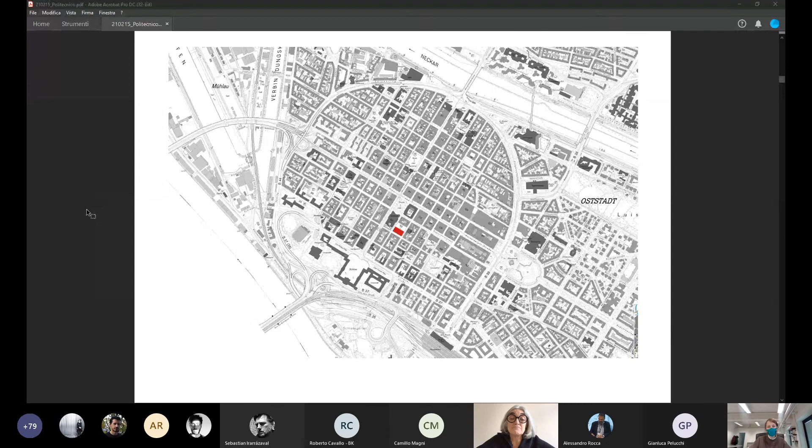Okay, so as you can see, a lot of new building of the 50s, of the 60s. It's not a fantastic, beautiful city, let's say. And the place where we intend to build is this part on the right side, and at the moment there is a garage.

On the place of the garage, we put our new library. And the idea is, of course, that we do not intend to confront the urban structure, but just to confirm this city plan.

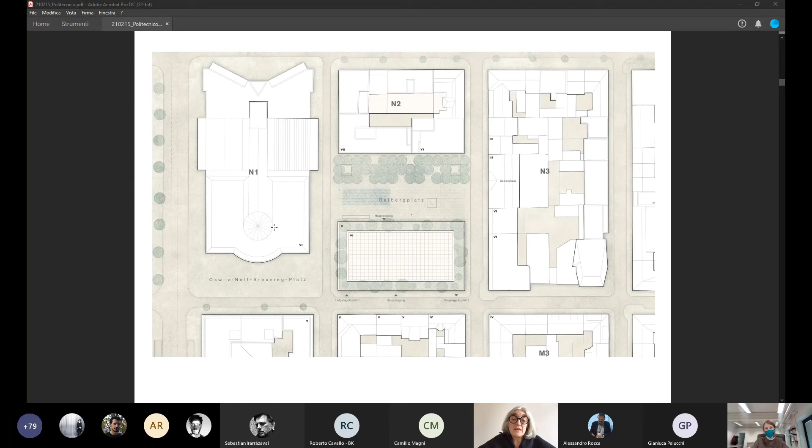So this project is mostly to understand in section, and we were looking for a strategy that allows us openness, flexibility, sustainability, which is a big challenge in this time, and at the same time identity, specificity, and a sort of toughness or robustness, which can endure the change over time and nevertheless maintain its character.

So we thought it was very important to find a structure which could maintain an idea of identity, of specificity, and at the same time allow this flexibility and openness.

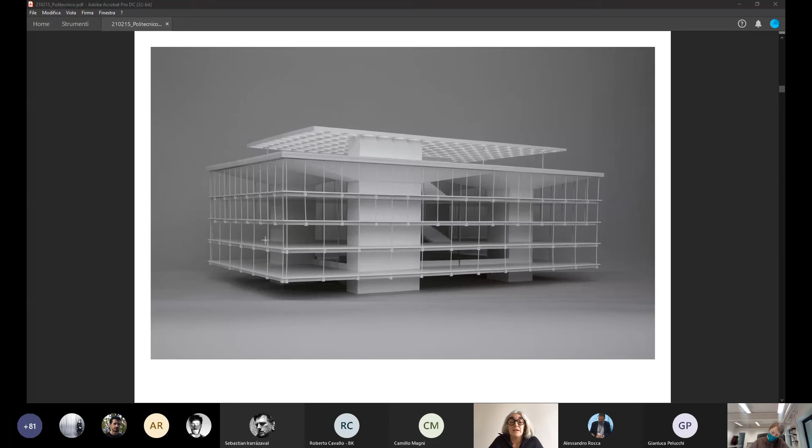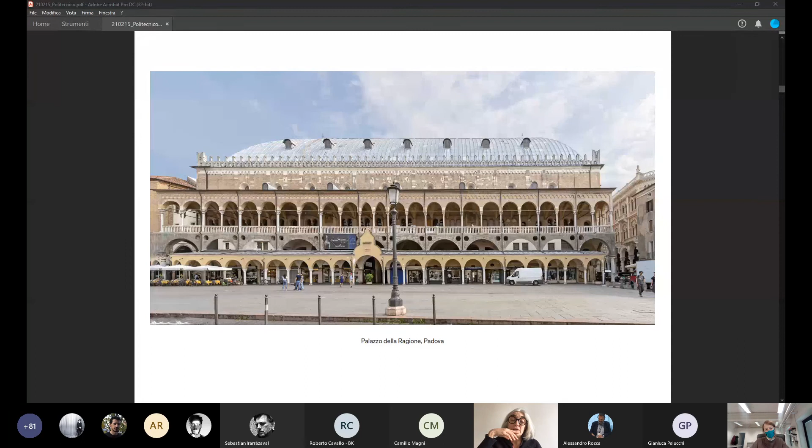A very important reference was the Palazzo della Ragione in Padua, with this transparent and very permeable ground floor and a structure above.

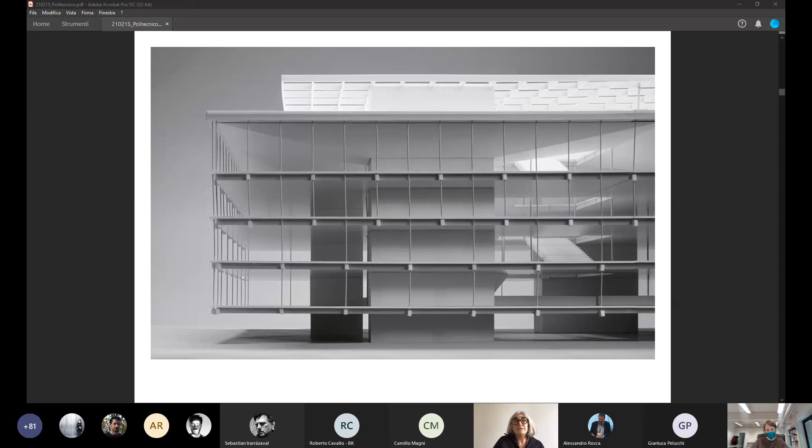So as you can see, we have four mushroom structures - in Italian, una struttura fungo, in German, Pilzstruktur. I don't know the right translation in English, but you have a structure, so four pillars in concrete, which contain all the secondary functions, the stair, the lift, the shafts, all the technique, etc.

And above, which can offer a perfect container for earth - we have a big garden on the roof, and there was a specific request of the briefing of the competition. And from this big element, we suspended a construction, a wood construction.

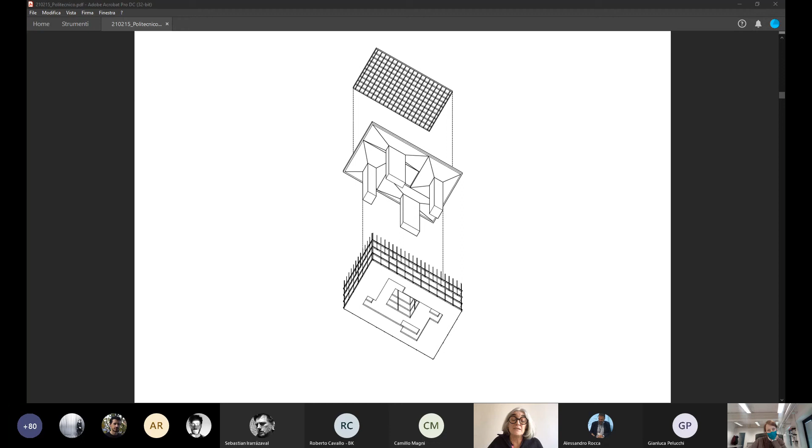So that is the element, the four pillars of the mushroom construction, and then the hanging wood construction.

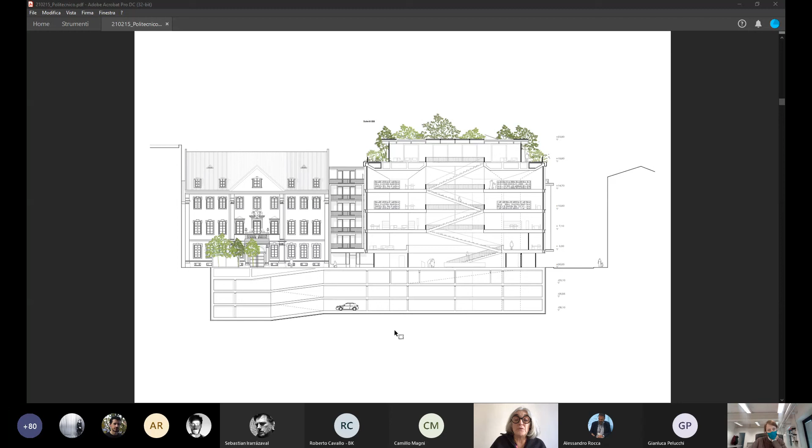We have a big staircase, an open staircase, which is also almost a space, which unites the different floors.

And then you see here the four elements, which allow a very flexible room that can change over time. That is the ground floor - it can change over time, so it's not specific in the distribution of the function.

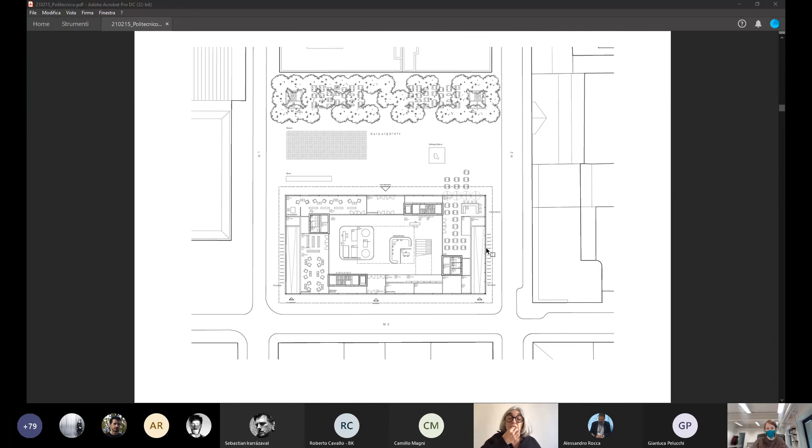So the same idea, in a way the same situation, you can find on the next floors.

So here the structure, the section, the detail. That is also a very important aspect of our work - we are working at the beginning of every competition, and of every project, with structural engineers and with specialists for systems, for facility, for technical building equipment. In this case we're trying to work with really good ones, since they are as important as the architect. So I think at the moment there's no way to work alone as an architect - you have to have your team, very, very good engineers.

For this work, for instance, we worked together with Transsolar - we made a fantastic energy concept. And with the structural engineering office Schnetzer Puskas, which are, in my opinion, one of the most interesting structural engineers in Europe. They work with a lot of Swiss architects, and it's really incredible. It's extremely noticeable when you work with this kind of engineer - their work is exactly as creative as our work as an architect.

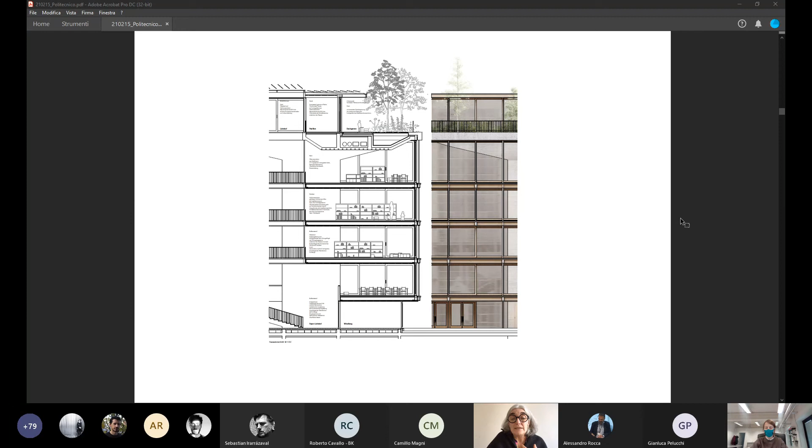So you can see some images of the model. We work a lot with models because a model is really important at the beginning - this was a model we were doing during the competition, because a model is really a way to understand the spaces.

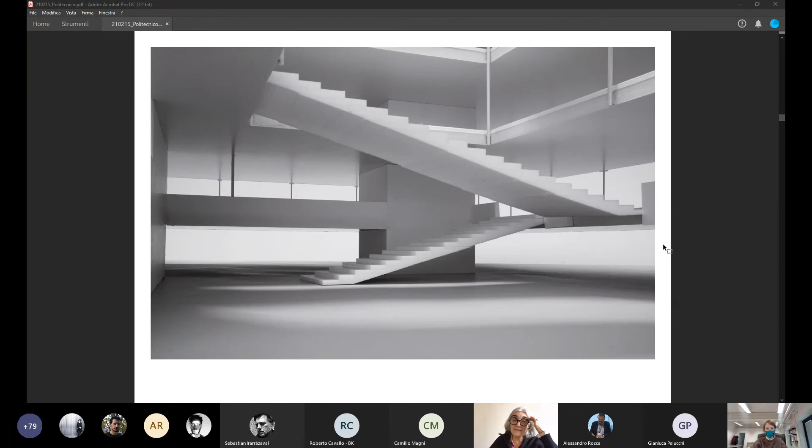Okay, that is the staircase between the different spaces. And that is the upper floor, where you can perceive the dimension, the form of this big pillar, and the mushroom, you could say.

So I was talking before that the way we understand knowledge, how we understand how to convey knowledge, is changing in recent times, at the present day, and it's also consequently changing the way we are teaching, the way we are intending teaching. So the idea...

The way we are intending teaching is changing, so the way to convey teaching. The frontal lesson will be less important. There is a different way to teach: teaching in a small group, teaching all together in a bigger group, and teaching in small projects and so on. Mostly our schoolrooms are not able to respond to these different requests from the program.

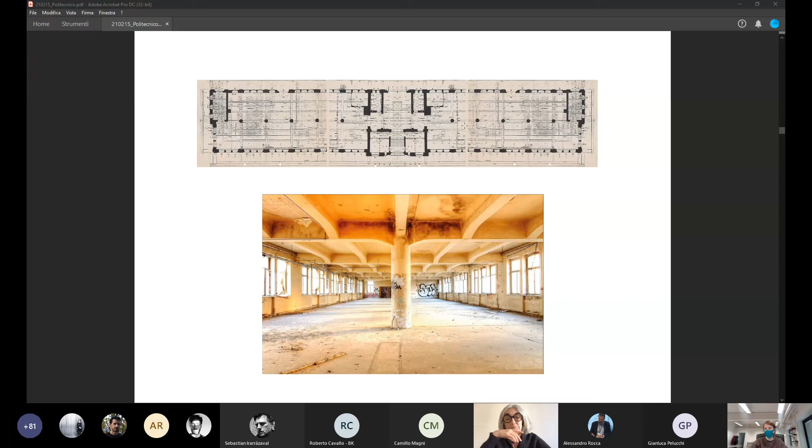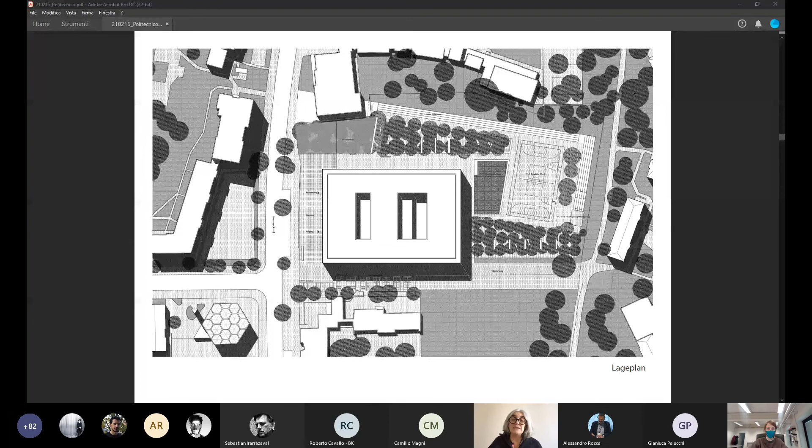In this case, we had a very small plot, but in Berlin there is a big need for schools. They are trying to build, I think, 80 schools in the next 5 years, and they are looking for any plot they can find to build a school. This was a very small one because the external part is also very important - the external sports places are very important for the school.

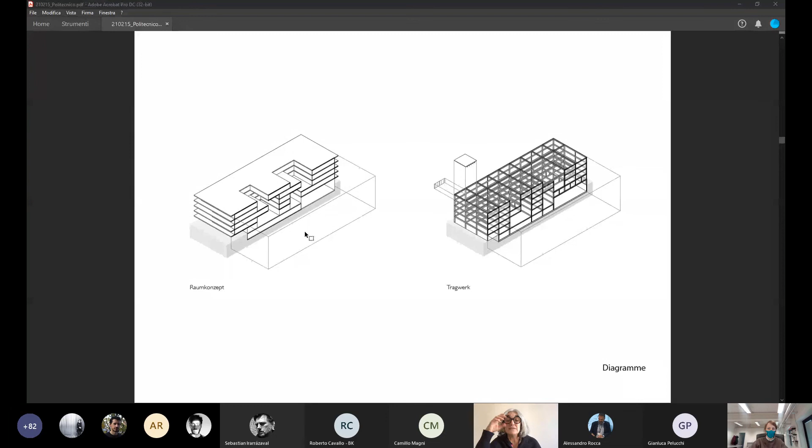This project is better understood in section. It's a grid principally. On the left and right you have the classrooms, and in the middle you have the library and different kinds of workshops. Between the workshops and the classrooms you have very big spaces, as big as the classroom, which are distribution spaces but also spaces where you can learn informally, with different possibilities of learning and interaction.

We also integrate the sport facility on the ground floor - you can see it on the right, the gymnastics hall. Since it was really a problem to use as little space as possible, we used the floor above for the structure of the sport facility, so we don't need extra space - we can use every space. So the structure itself is also a space that we use for our program.

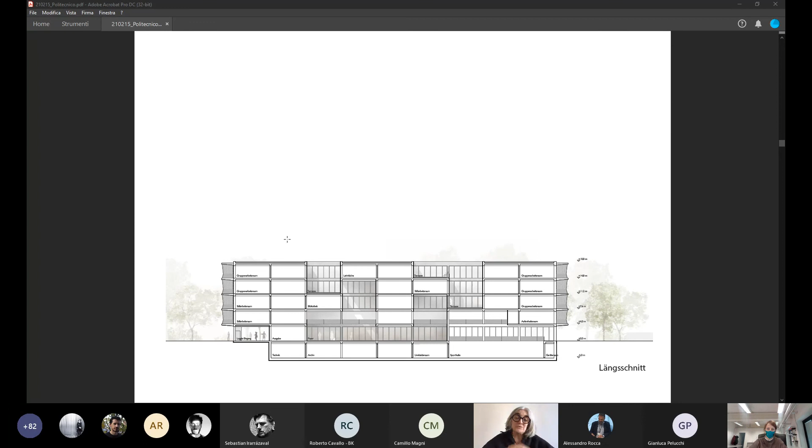Here too, a very flexible space. This is the problem when you try to use the corridor as a teaching space - you have a lot of problems that have to do with fire security and of course structural problems. We solved this problem with a balcony, a walkway for the fire escape, but also used as a room.

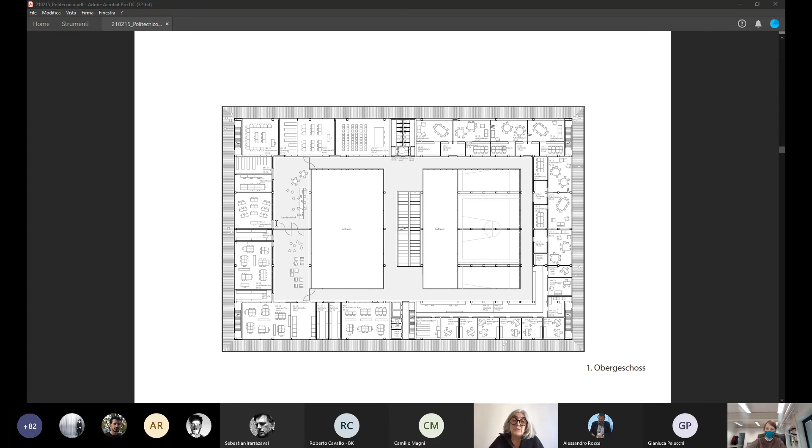That is the idea of the school, and now we are working with a very similar principle for 7 schools around Berlin.

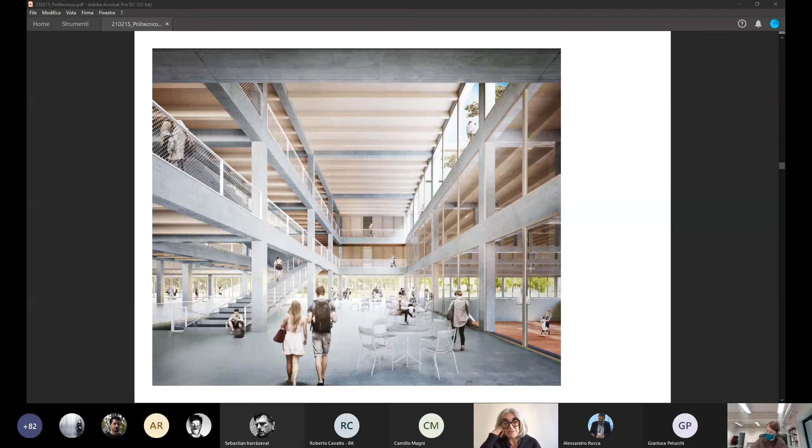In a very similar way, we worked with a kindergarten, in Switzerland, in Lugano. The idea is in a place in Lugano - on the left side you have the historical city, on the right side is where the kindergarten was built.

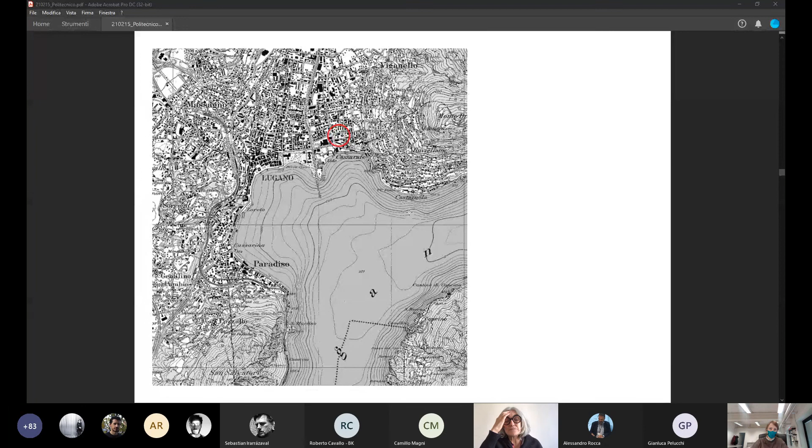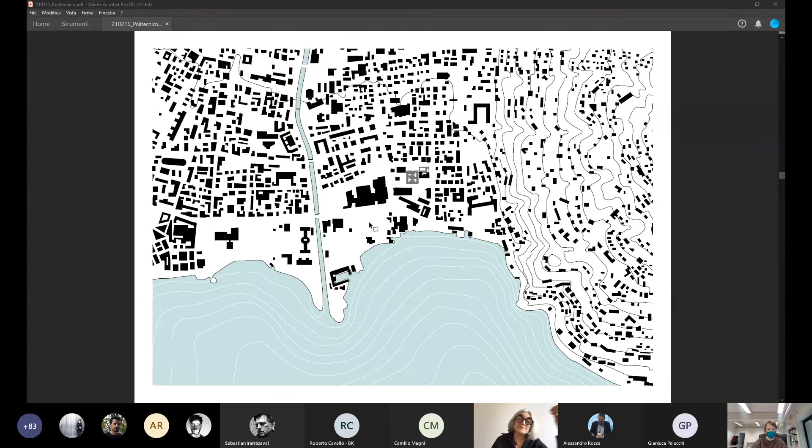This is part of the 1970s city, the city of the 70s. It shows a very typical structure, like a sort of compromise between the city of blocks and the modern idea of the city, with the green and the buildings on the green. Actually, the problem is that this kind of city proposes a lot of junk spaces - not all spaces are really well thought out or well done. So that is the situation.

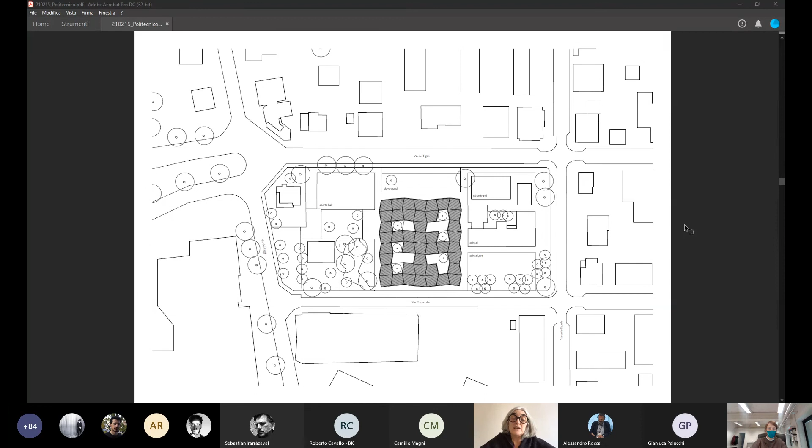So maybe I won't go too much into the question of the urban structure. We have to complete this block, and on the right side we have the school, and we completed the school with a sort of covered playground. On the left side, there is the kindergarten.

So both buildings have this: the existing school is completed with this covered playground. On the other side there is the entrance of the school and of the kindergarten, and in front of the kindergarten, from this side, you see a playground.

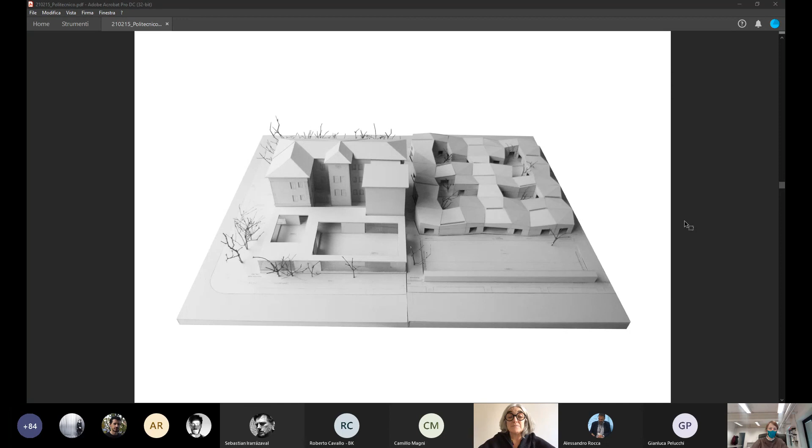The building is a one-floor building. We think that for a kindergarten, a one-floor solution is a very good one. We decided to work with this building with an idea where we try to bring together the distribution and the spaces of the classroom, so we worked on that next.

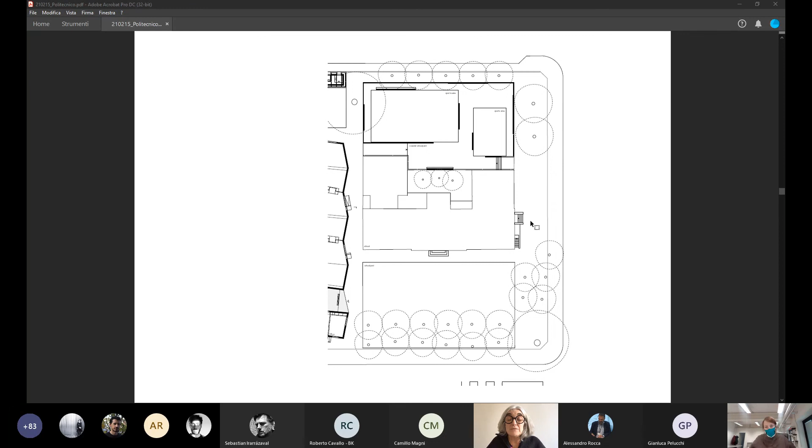That is just the covered playground. It's a concrete structure, very different, completely different in idea from the kindergarten.

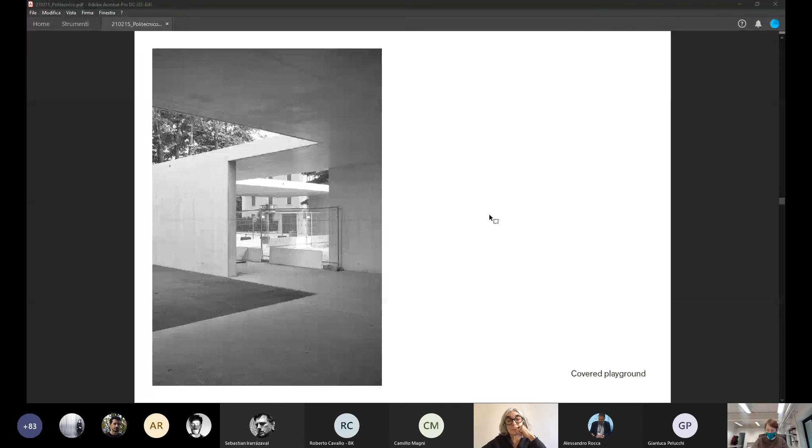But I want to talk with you about the kindergarten.

A very important reference for us was this beautiful building by Scharoun, the Geschwister Scholl Gymnasium in Lünen. As you can see in this building, Scharoun works very much with space, with the definition of the space in between.

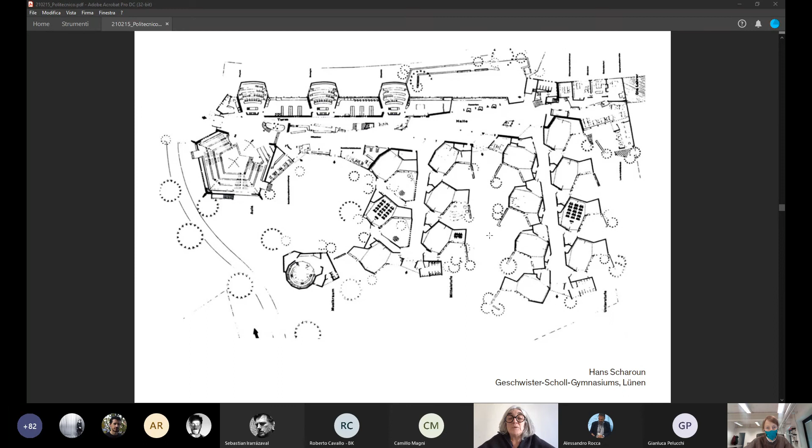So creating a very interesting gradation in privacy: from the privacy of the room, there is then a sort of space for entrance into the classroom. And you also have a sort of garden, an open garden that's considered like a sort of open room. It's quite interesting how one room leads into another.

So we used a principle known in mathematics, in geometry: tessellation of a flat surface, which is the covering of a plane using one or more geometric shapes, let's say tiles, with no overlaps or gaps. In mathematics, tessellation can be generalized to higher dimensions and a variety of geometries. But this idea was used a lot.

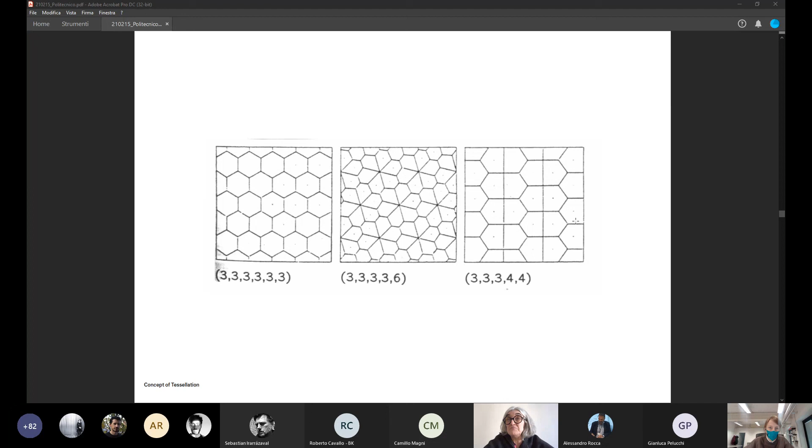Those are some examples of tessellation, which was much used in architecture. That is very typical for the Alhambra, so the beautiful tiles of the Alhambra become something else. And so we tried to work with a sort of tessellation, a very simple one in comparison to this, for instance.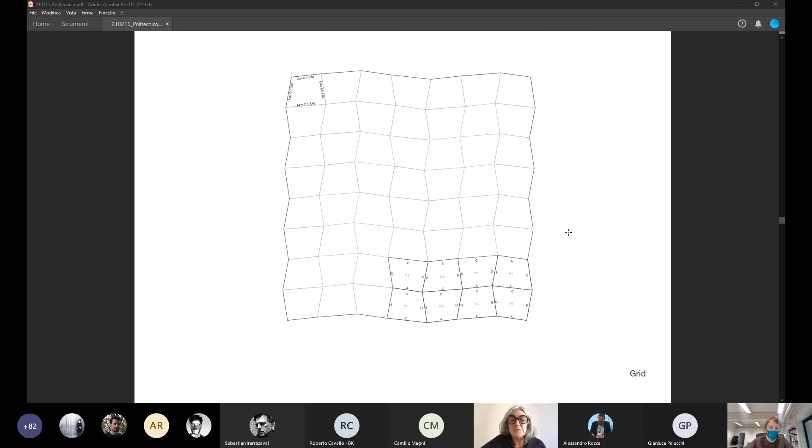So you see the grid, the initial grid, which is made from a module—actually 4 different modules. That is the principle of the work.

We have 5 teaching units, and every unit is composed of 5 different rooms, so 5 different modules put together form the unit. You see the module at the beginning, and then the first classroom.

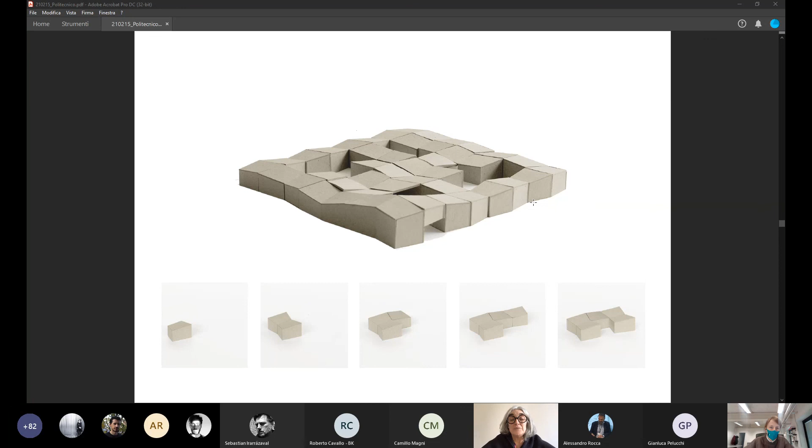Then you see the different classrooms. They come together, put together in different ways, so that you have a sort of differentiation within the uniformity of this grid. Every time you have a different situation through the light, and the classroom functions a little differently, but of course it's always the same room, just composed together differently.

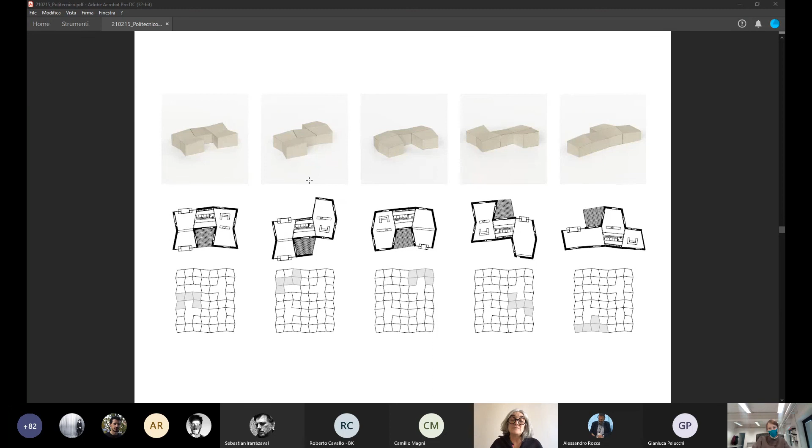So that's the part we were working on with a model during the competition, just to understand the structure of these elements. Of course, this kind of moving wall has some quite interesting aspects for acoustics, which is very important in a kindergarten.

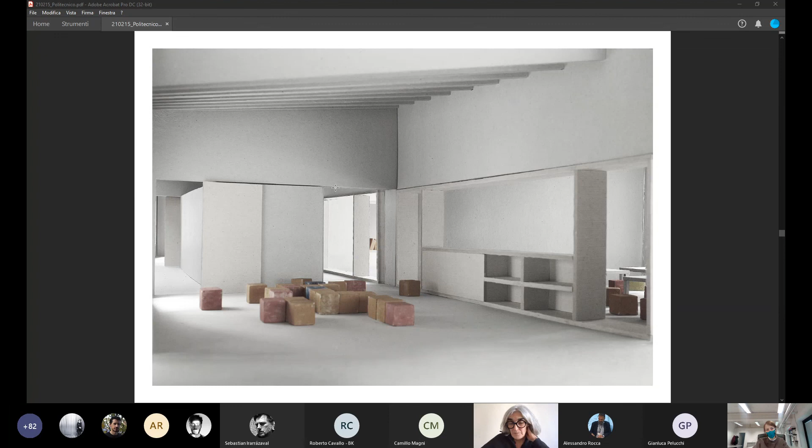So that is the photo we give instead of the perspective. Next, photo of the model.

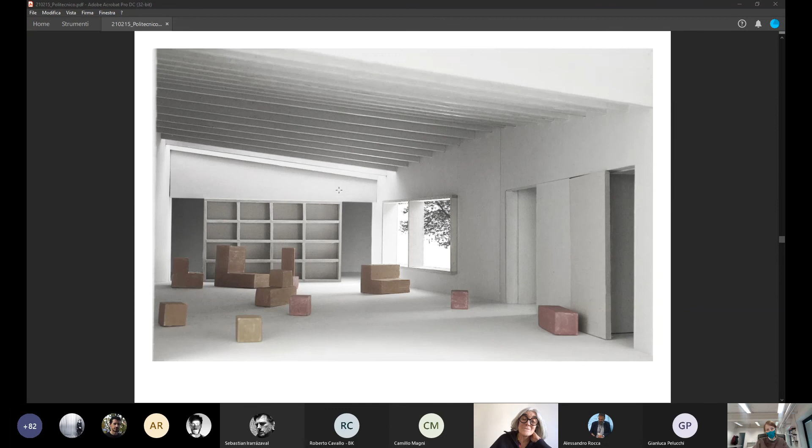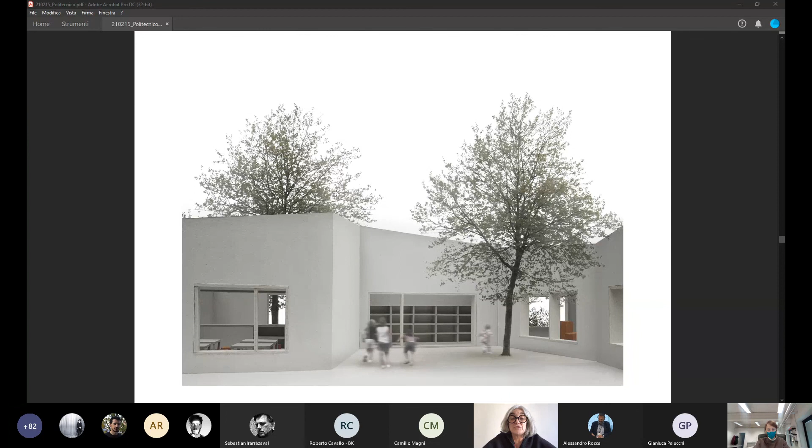And so you see, from the right you can enter the kindergarten, and there is a big floor space. It's not a floor, it's not a corridor, it's really a space—a space you can use in summer to play. That's quite interesting, and they do use it.

You can use it for a sort of market, you can use it for assembly, you can use it for different functions. As you can see, there is no distinction between the corridor and the space itself.

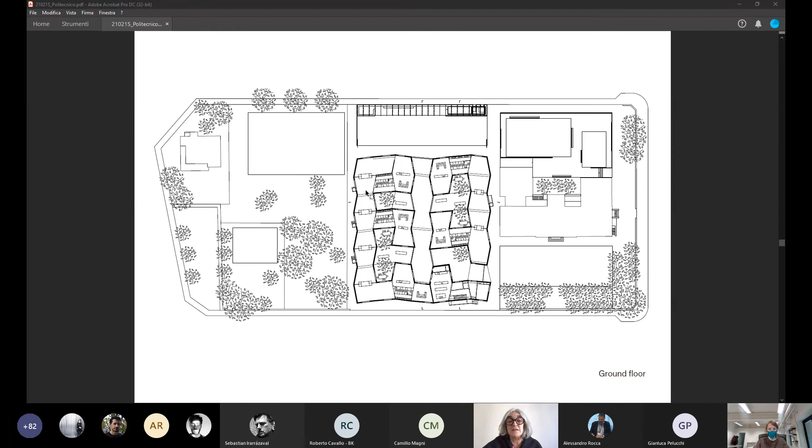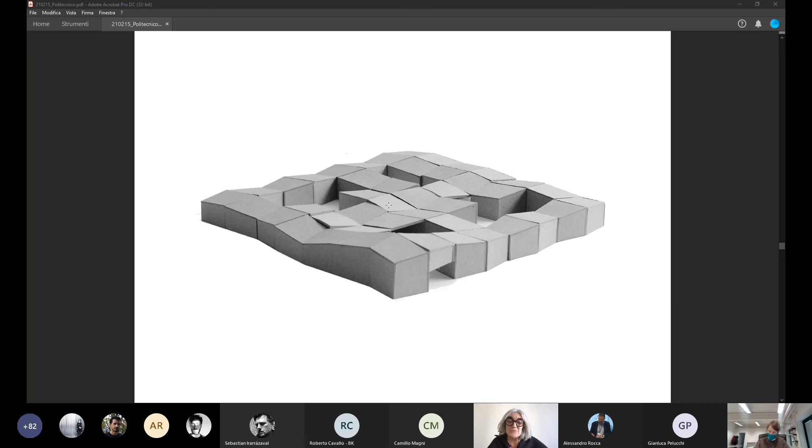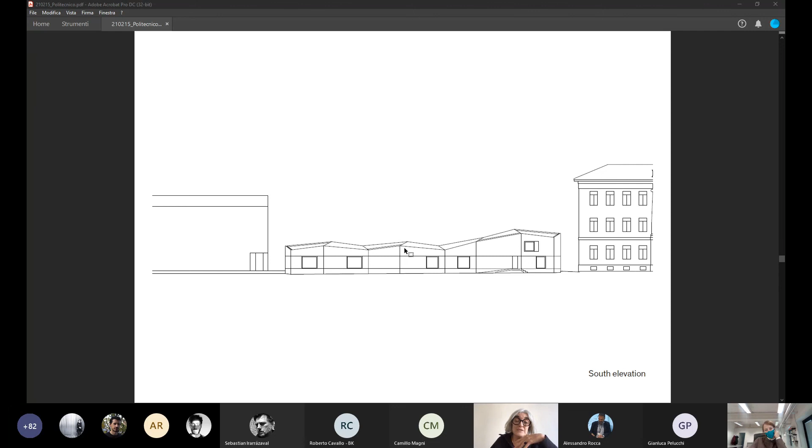We decide to sign the entrance, to make a small deformation on the entrance, because on the first floor there is some space for the administration, and also it will be a nice way to signalize the entrance.

We go maybe into the construction. This is the idea of construction. We are working with laminated veneer lumber, so with very big slabs of timber, almost massive. It's a very strange way to work, because all the classic tectonic of timber is questioned. So we have a concrete basement, then wall and opening.

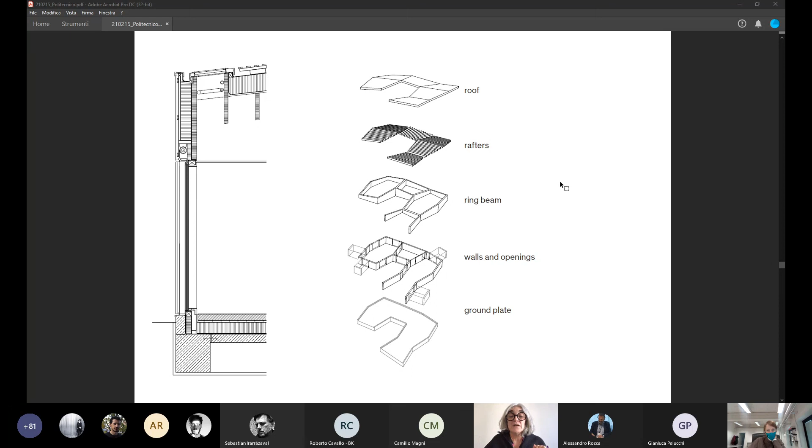So we can go to the ground plate, and the part above we use. You can see in this construction site photos how we use a sort of non-tectonic way to work with the wood.

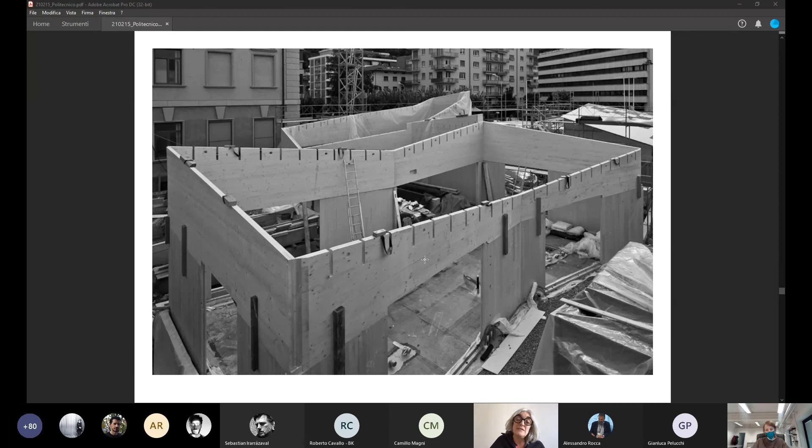So we cut the wood structure and put the beams there. It was quite interesting because it seems a little bit complicated, but actually every module is the same. Of course you have to work with the digitalized cutting machine, but that's now normal in every wood production. It was quite nice how precisely you can fit these elements together.

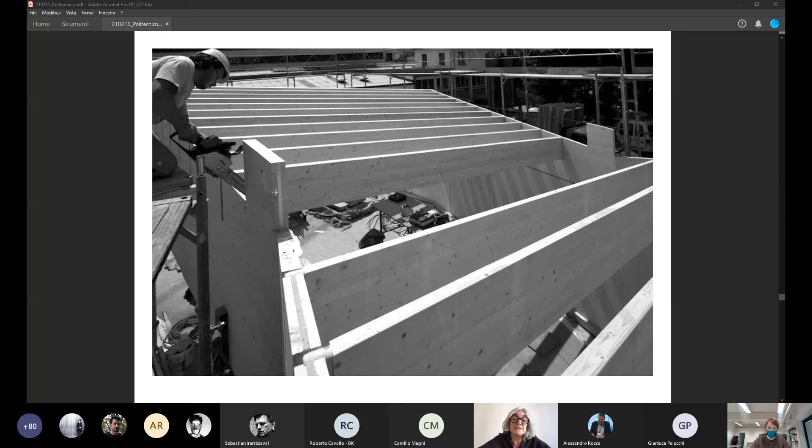It's almost like working with cardboard. It's quite interesting, the possibilities you can have with this kind of new material. That's during the construction site.

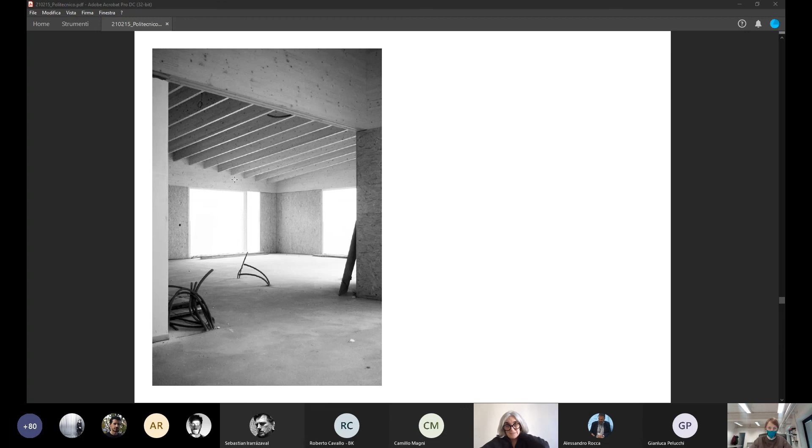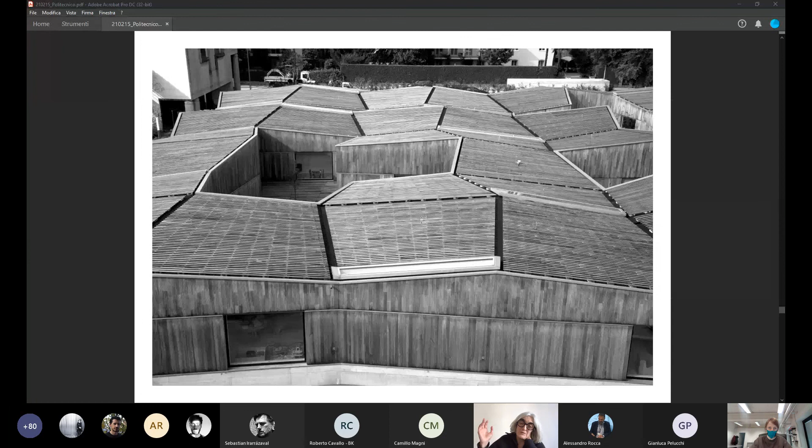So then we decided to have wood overall, also in the roof. It's quite a complicated detail, but it's possible.

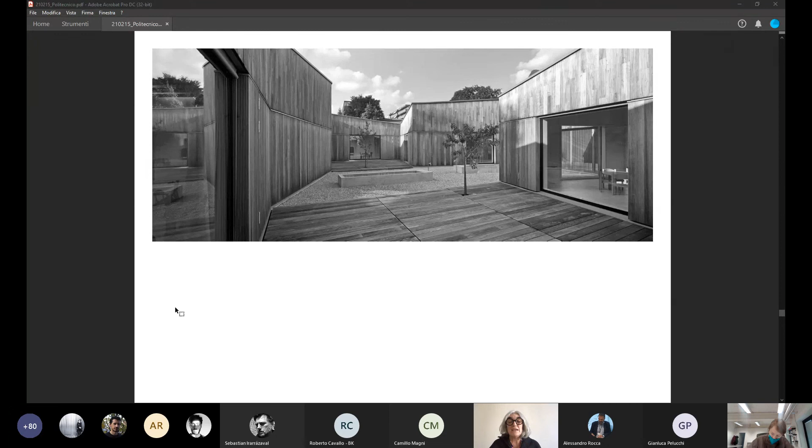As you can see, there's continuity of space between the interior and the exterior. We wanted always to make photos with children, because we did it before they used it, and now we need absolutely to make photos with children, but it's always a little bit complicated.

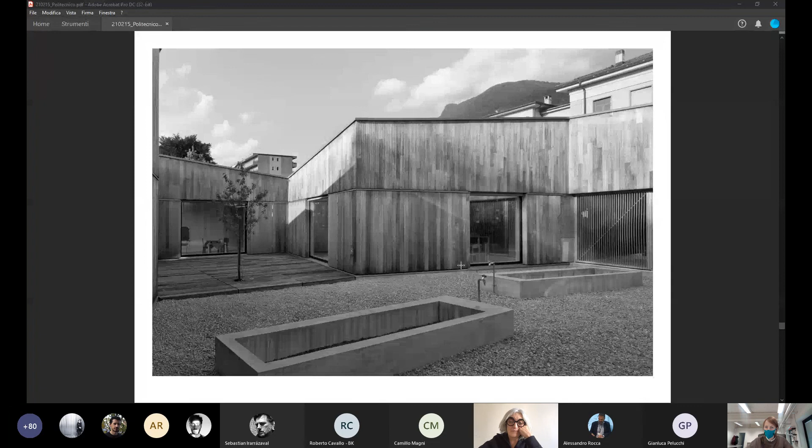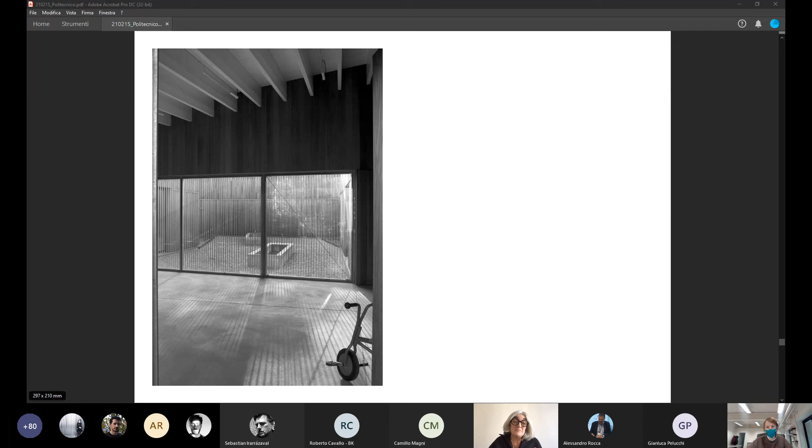That is, for instance, the space between, which is also the major distribution, but also a place that they use really a lot - as a playground, for different events, also for the community.

This is the room, the interior, and we decided not to use color, just a very thin sheet of color so you can see the texture of the wood but not cover it. We also don't want to use other kinds of colors. It's almost white, because we thought the children would bring the color there, drawing and so on.

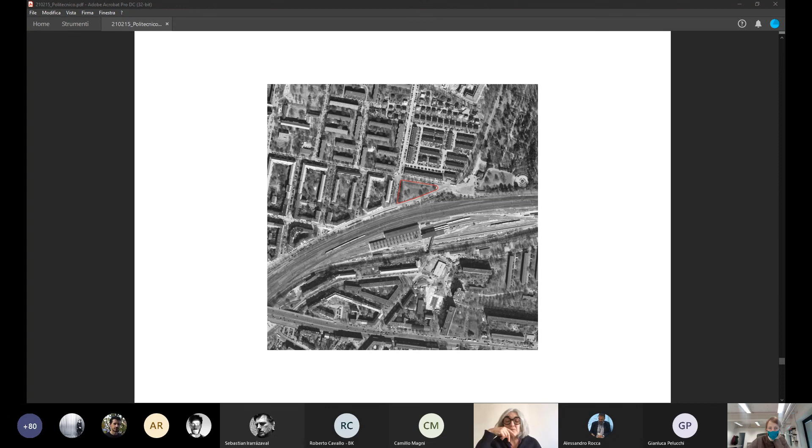So that is the last thing I'll show you - a sort of reinterpretation of this principle of tessellation. It was a competition, also in Berlin, and we followed this principle.

It was a really small plot, and we decided to work with this kind of room, with the idea of having continuity with this kind of geometry. It was quite interesting, because we could solve the whole program, but it was also the smallest one, so the relationship between net and gross space is very convenient.

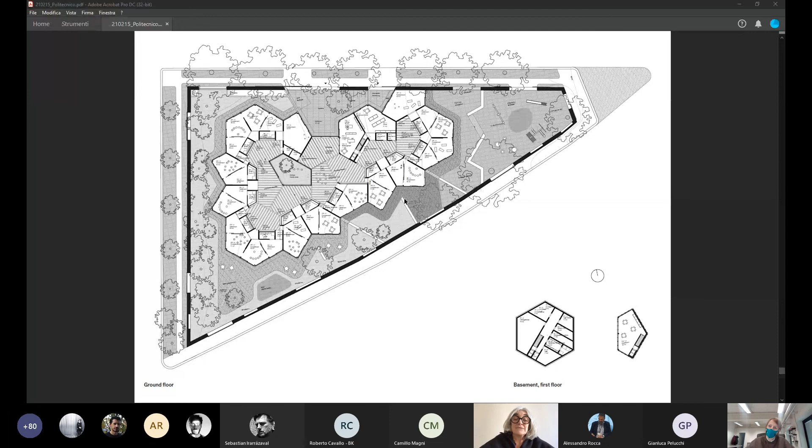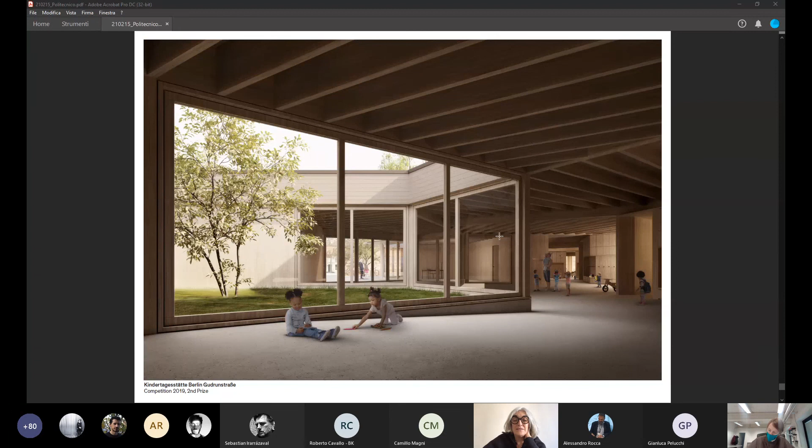That is the idea of this space.

Maybe I already talked too much, so I just want to end this conversation. Thank you for your patience, with this beautiful quote from Virginia Woolf, from To the Lighthouse - one of my loves, as I love her very much. 'Beautiful and bright it should be on the surface, feathery and evanescent, one color melting into another like the color on a butterfly's wing, but beneath the fabric must be clamped together with bolts of iron. It was to be a thing you could ruffle with your breath, and a thing you could not dislodge with a team of horses.'

And that, for me, is the dichotomy we are working with in architecture. You have to follow the fragility of the idea, of the concept, but to make it, you have to work with the bolts of iron. I think at the moment, our work of making architecture is very difficult. I've been working for 25 years, and it's always more complicated - you have more laws, the question of sustainability makes it very complex, you have new regulations and a lot of questions from society, from the public. It's really difficult to work with something so feathery and evanescent like an idea, and very difficult to carry that idea through the project into the process of construction. So I think it's a beautiful way to put it - in a way, our drama, our joy, and so on. Thank you for your attention.